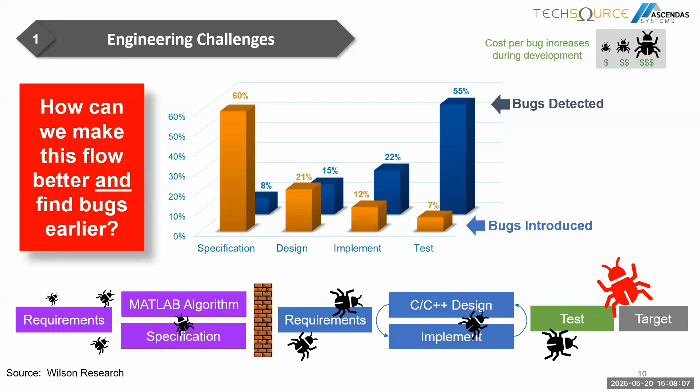In this case, how do we make this flow better and find bugs or errors early in our design? We will help you do this using our tools for model-based design.

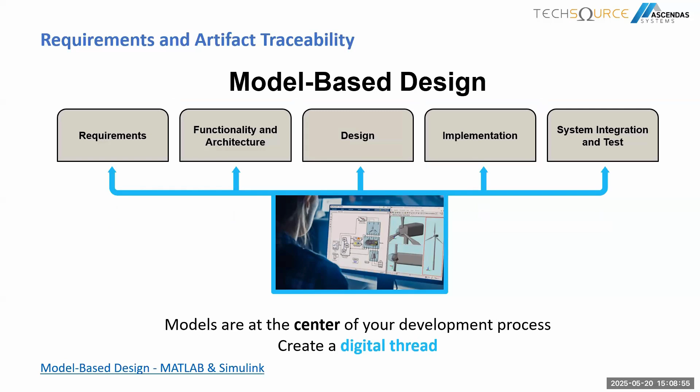Number one is actually requirements and artifact traceability. With model-based design, which uses multi-domain models, this serves as a single source of design truth across all phases of development, so that you can eliminate the barriers in the development stages by promoting understanding and communication across all these different teams. That's the first thing we wanted to share - working in a single environment with requirements. Models are actually at the center of the development process, creating a digital thread that enables all the systems to be connected in this case.

So what model-based design actually gives you is the automation of the processes. So we start with requirements, specify system behavior, and then we do simulations, right? And then from there on, we do the foundation for automation, which is code generation.

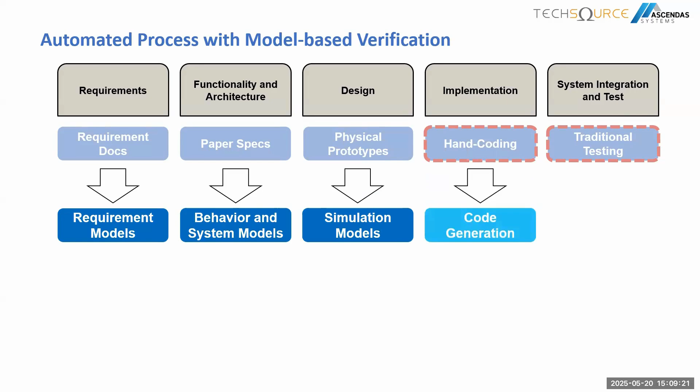And then in this case, the testing is not actually only at the end of the design process, but it's much more within all the scopes of the system design, starting from the requirements verification, and then early design verification on your models. So we are actually verifying from the start until the end of the development process.

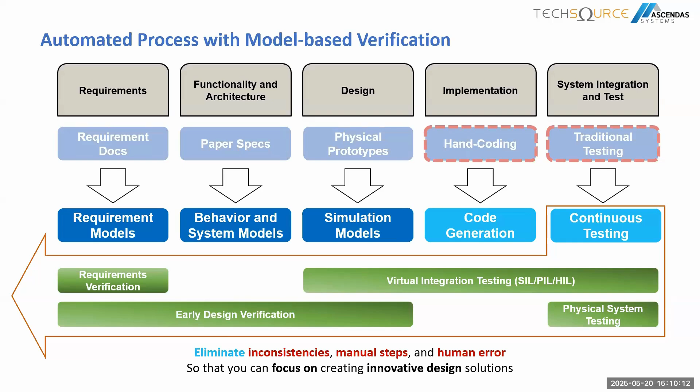So in this case, we eliminate inconsistencies, manual steps, and at the same time, we avoid human errors. So every design engineer is just focusing on the algorithm development, on innovative design. So that is where I think model-based design actually gives us an initiative.

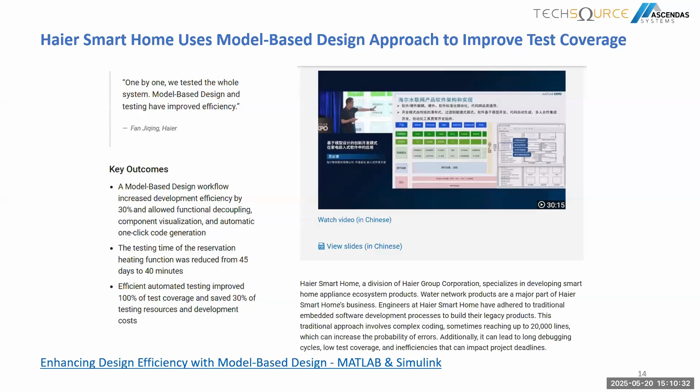So I'm just showing a few examples of our customers that have used model-based design to develop their products, their algorithms, their embedded systems using a model-based approach. So let me go through more details of why verification and validation is important, and how we make use of it.

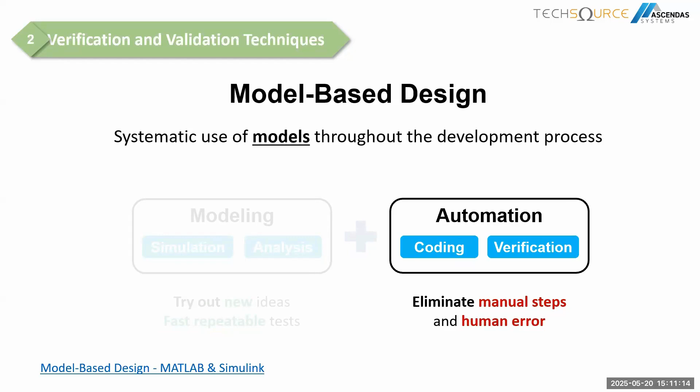Systematic use of models throughout the process, where models let you try out new ideas in fast, repeatable tests. So you can do many tests in a single click. That, I think, is very important. And then in the case of automation, we develop mostly automated coding and testing, thus eliminating the manual steps. And eventually we remove the errors.

So this is the main objective of verification and validation, where early simulation-based verification and testing is done through the model-based design workflow. It succeeds in interconnecting the requirements of the product or project and the functional design; everything ties up. And the verification of the design is tied to the requirements.

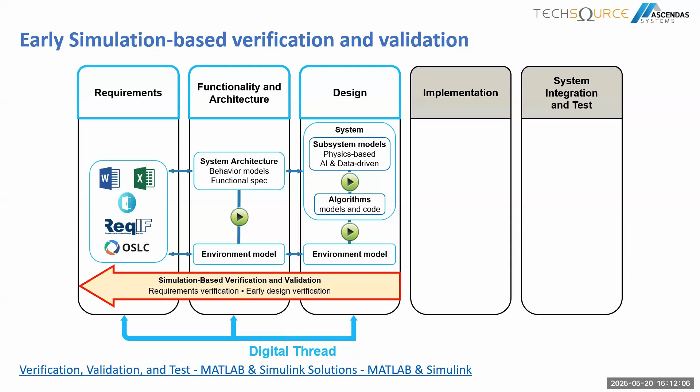So at the same time, we are verifying the design, and we will be catching all those errors and bugs early in the design phase. So that is the objective of simulation-based or model-based design verification and validation. From requirements to testing to implementation, we are able to do this verification.

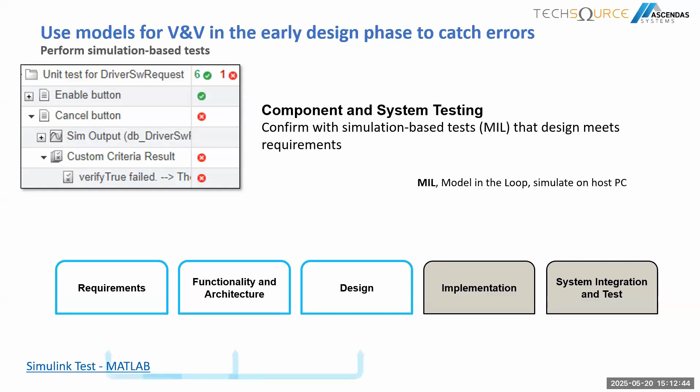So an example is component and system testing, where we want to do a simulation-based test. In this case, MIL, which is model in the loop. You are developing certain models, and from those models you do simulation-based tests to ensure your design meets certain requirements. So those are the things that you want to do.

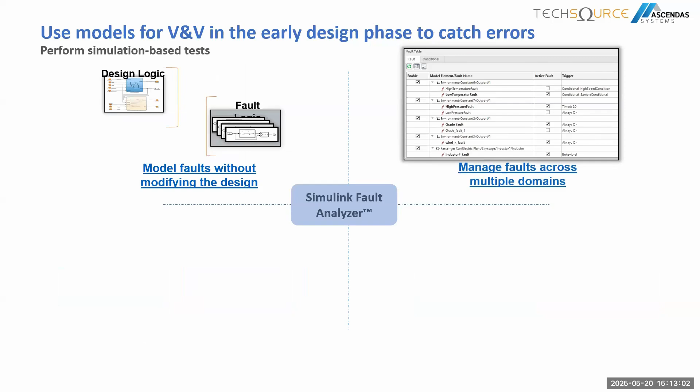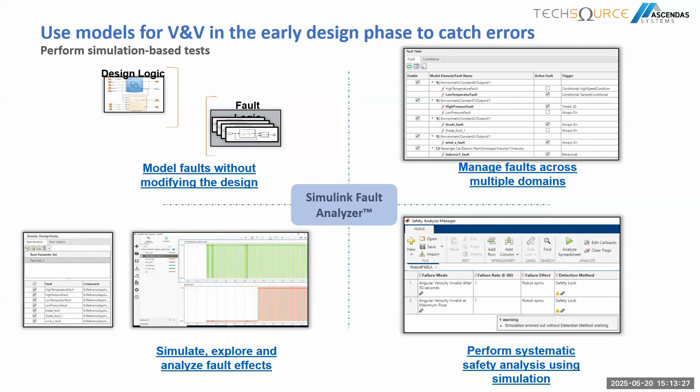Another way is Simulink Fault Analyzer, where you are able to place faults or errors within the system and check whether your algorithms detect these faults. This is especially useful for safety systems, where we are able to emulate certain kinds of faults within our system and eventually catch all of these, as examples of debug processes. So model-based design helps you do this.

Another one is standards compliance and review with static analysis. When developing implementation models, you need to ensure that the model conforms to the industry standard. So even at the start of the design, we are already checking this requirement, and we are also linking all these systems.

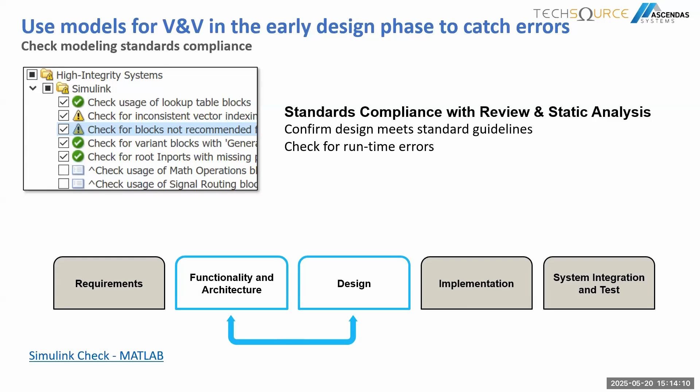So you can use Simulink Design Verifier to check runtime errors, such as division by zero or integer overflow, as well as dead logic. So we are able to run those checks in this case.

Some requirements, such as safety requirements, may be impossible to verify through simulation-based tests, so we are able to do formal verification. Simulink Design Verifier can prove that these requirements are always met. So these are just examples of what we can do.

So let me go to a demo where we will do requirements linking. And then we will do a little bit of Simulink Test, where we can run multiple tests within the system that we want to test.

And then I was telling earlier that in just one click, maybe we can actually do a lot of testing. So let me go through an example that I wanted to share with you guys. Let me open up my model. I hope you can see my model. This is a position control of a DC motor.

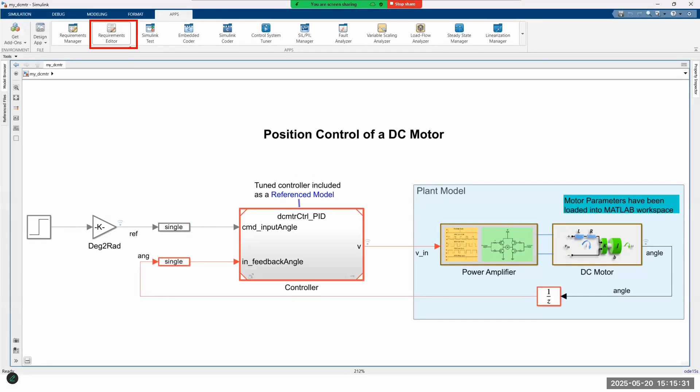What I wanted to share is how do we link requirements to the models or the design that we are going through. So for example, we want to open the Requirements Editor. Let's open it up and see how we can use this tool. In this case, I already have some requirements that I imported earlier. If you want a new set, you can just place a new set and then add child or parent requirements.

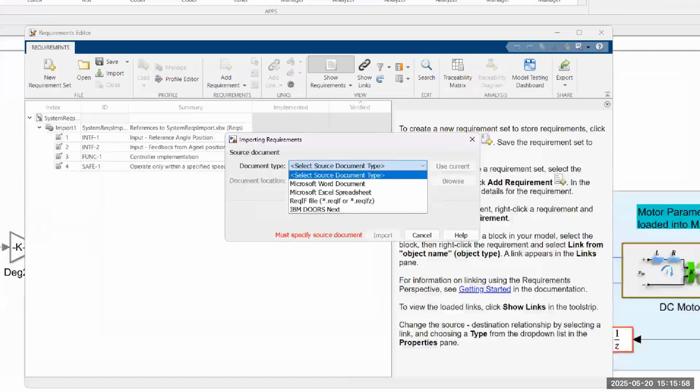Or you can also import files from external sources. In this case, you are able to import certain files that you want to use. For example, most of our requirements are coming from Word documents, right? Or Excel files. Or in this case, a requirements document, which is ReqIF, the Requirements Interchange Format.

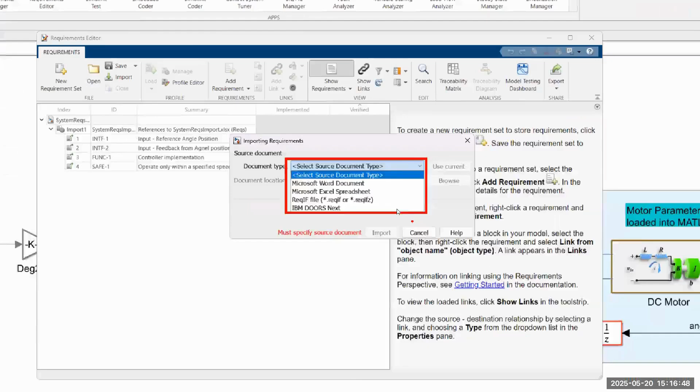So maybe if you're familiar with DOORS or maybe Jama, I'm not sure if they are able to create a ReqIF file, but I guess you can export it from those third-party softwares and then import back to MATLAB or Simulink. In this case, I was able to import it from an Excel file, which I did earlier, and then provided some linking.

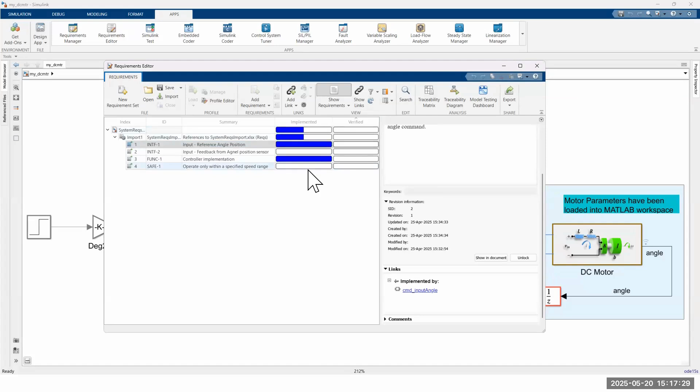Some of these requirements are already linked. So maybe I can show you. These requirements can show you if they are already implemented or you want verification. You can see here two columns, which show you if certain requirements are already implemented or not, or if they are doing certain testing. In this case, the blue ones are the ones already implemented, for example.

So let's say we wanted to implement this one. The implementation is seen here, where you have a link on the Requirements Editor itself, and then you can click it, and it goes to the model where it is linked. So in this case, all the design and the requirements are linked together.

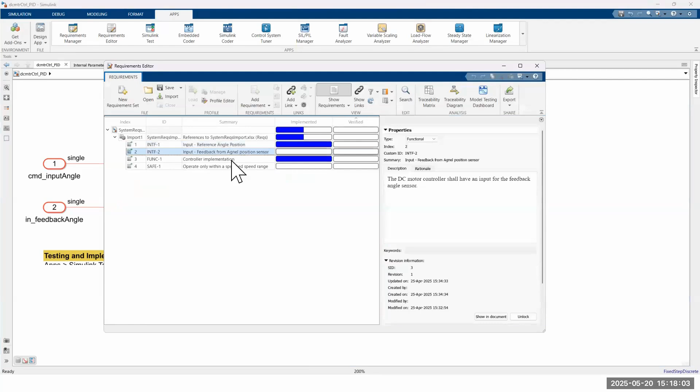So for example, we want to link this requirement. We just right click this one and select for linking the requirement. And then, for example, this input feedback is for this requirement. So it goes here, and then we right click this one. And if you can see, we can link this requirement in selection. So select for Simulink linking. With this, you are able to link your requirements on the system.

So now you see it's now blue. It means it's already linked within your model. So the linking is very easy. It will be implemented by this, and you can see it's being highlighted. So that's how easy it is for engineers to have documents for requirements, and then link those requirements within a single environment, MATLAB, using the models that we have.

Later on, we want to link also the testing for the requirements. So here we will see certain requirements being linked in this testing. So this is one way of linking all those requirements. So now how do we do testing for our model-based designs? Let me close this one for the moment, and then let me open up

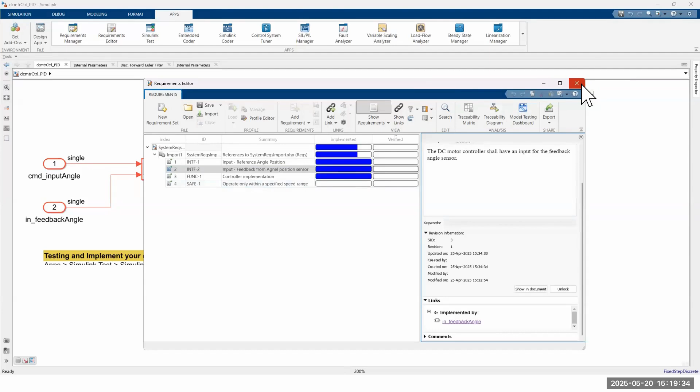the model again. So here in this model, we can open up the app that we want to use, which is Simulink Test. With Simulink Test, we are able to do multiple tests in one single click. Let me show you how we can do this test. First things first, we have to create a harness. A harness is an isolation of the model that we want to test. In this case, we want to isolate the controller. This is the one we want to test.

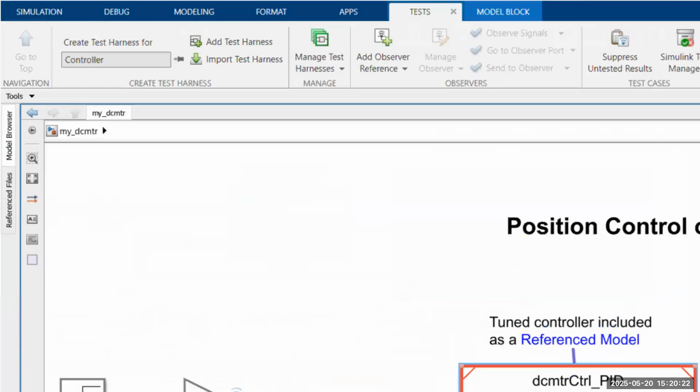So if you see here, we have already selected the control harness for the controller, and then we can actually add another harness for this. So once we have opened the add harness button, we can specify certain inputs that we want for the model. So for example, is it a signal editor in this case? Is it from workspace? Is the data coming from the workspace? So we can also do that, or a test sequence for that matter.

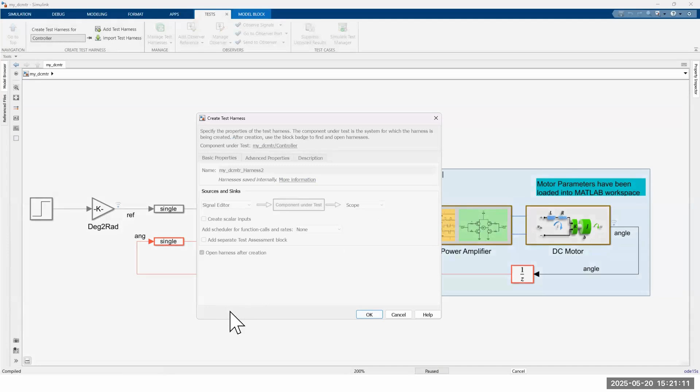So maybe let's select, in this case, a signal editor. And then this is actually our test component, which is the controller. And then let's say we want a scope only. So we can create those by creating a harness. So now we are able to actually create the harness within Simulink itself.

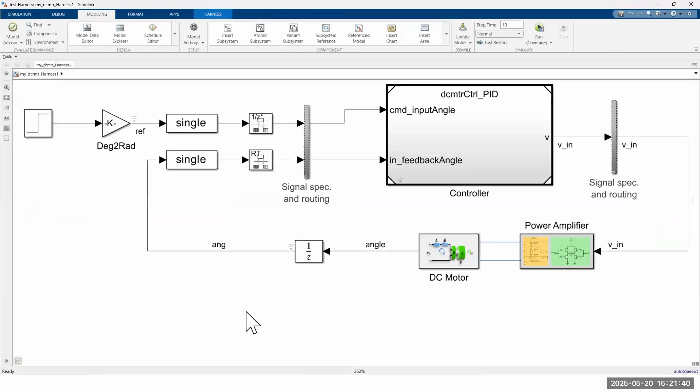So this is the created test environment. This is the input signal, which is the signal editor. And then this is the controller that we wanted to test, and the output we can actually view. So from here, we can do several tests in this case. So I have prepared already a harness for you for our testing, to be used for our simulation.

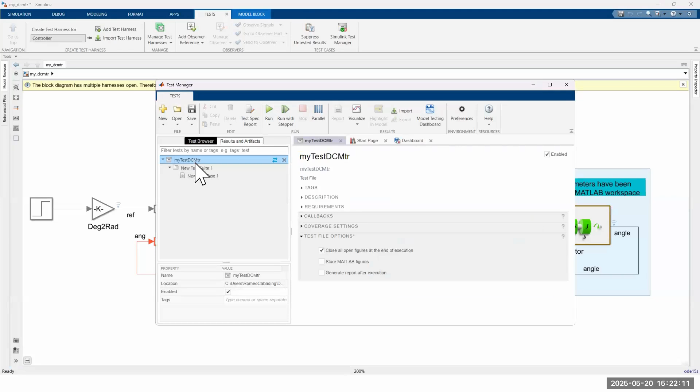So let me open up Simulink Test, and then see how we can easily do multiple tests at a single time. So I already have some similar files that we can use. So we can tie up several tests. So we can create a file, and then we can create a test suite, and then we can create new test cases. So with these test cases, we can run multiple tests. It can be more than what I'm showing. So you can run multiple tests.

You can do baseline criteria, for example. Baseline criteria is that you want this baseline data to be compared to some other simulation, and see if the system is responding similarly to this baseline requirement. So you can compare signals also in this case. And at the same time, you can also add a requirement in this case. So you can add certain requirements for this one and then link them to your testing.

So this is one way that we do testing and simulation within a single environment, and then easily you are able to create test cases for your systems. So that's how we are doing testing for multiple types within our model, to verify the functions, to verify the behavior of our systems. So yeah. So let me go back to the slides that I have.

So I have shown you the Requirements Toolbox and how we can easily add requirements and link those requirements. And then I have shown you how we can add a test harness for our model. And then from there on, we will add more testing scenarios for our simulation. So this is how we are doing the systems design verification and validation of our system. So from the requirements and then the testing, we are able to link everything together. So hopefully this helps you in your journey in embedded design.

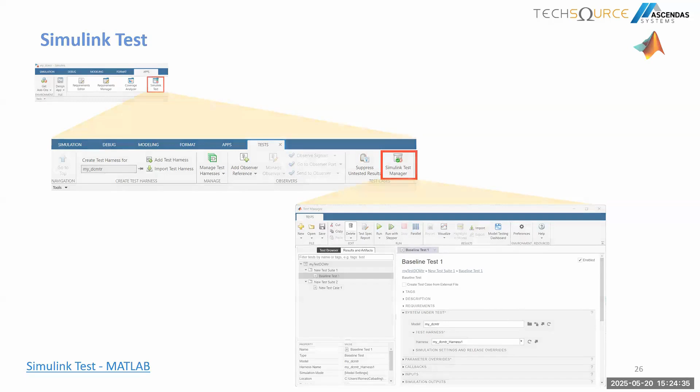So now let's move on to how we are doing model-based design code generation. Now we are moving a little bit to the subsystem implementation phase, where the code that will be deployed on the system in operation is being created. So specifically, this code links to the point where system requirements, documents, and your models are together. So there is traceability between the model and the code that is being generated. So later on, I will show you how this linking is done. This is automatically done for you from the design to your code.

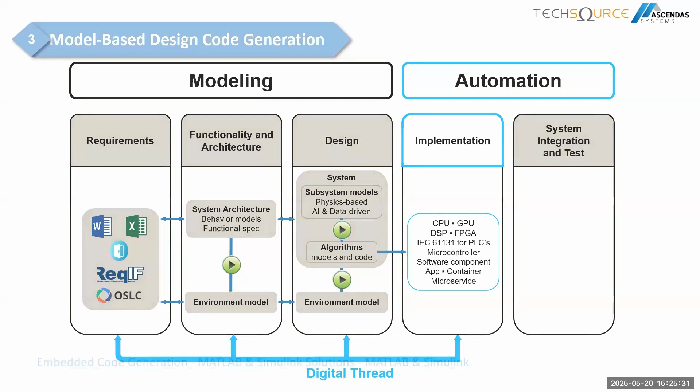So this is accomplished through the use of automatic code generation. So our core platform in MATLAB, Simulink and Stateflow all support automatic code generation to a number of different targets. So in this case, it can be CPU, which is relatively low cost and readily available. Other deployment can be GPU, a little bit more expensive to execute, but faster than CPU, right? Another way is to deploy using PLCs, or programmable logic controllers, which often control machinery or manufacturing processes in the factory, right?

In the factory setting. So these are several ones. Or we wanted to deploy on FPGAs, for applications that don't require really too much power or something like that. So within these 4 levels, model-based design may be able to help you to generate these codes

automatically. MATLAB is also able to generate code on big data platforms, cloud platforms or services, or edge networks. But this discussion is much more about embedded, which is focused on CPU deployment or maybe GPU, PLC, or FPGA. So you can automatically generate code from models you have created in MATLAB, Simulink, or Stateflow, for example, onto these targets or devices that you want to deploy.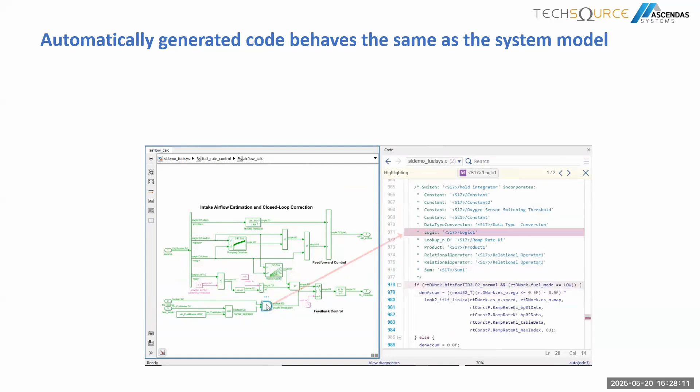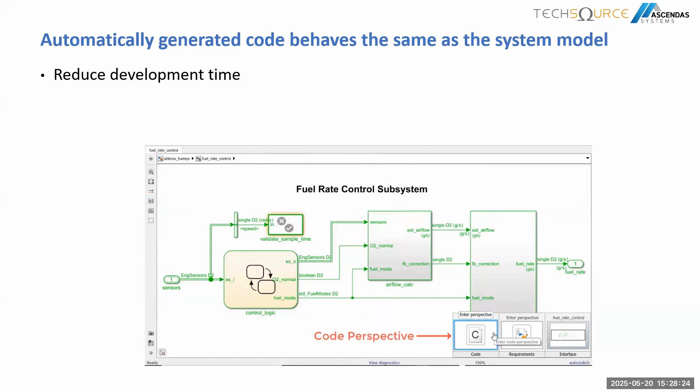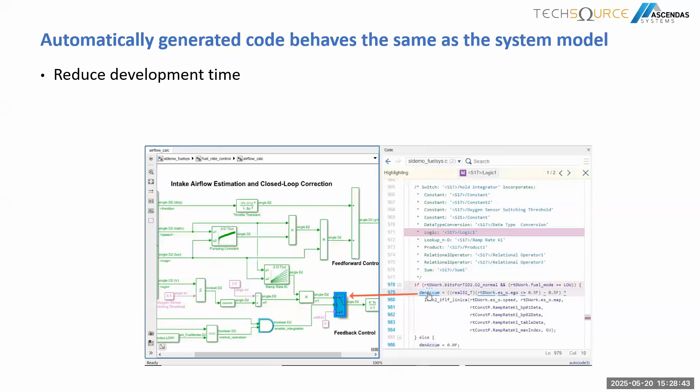So automatic code generation generates readable, compact, fast C and C++ code for embedded processors. You can integrate it with handwritten or legacy code, and still check it using our tools. What it does is help us to reduce development time because the code is automatically generated for you. And it also eliminates the errors prone with manual coding steps, refining executable specifications into the target device that you want to deploy.

And then you can use bidirectional linking in Simulink models to trace how your model is coded or from where in the Simulink model the code has been generated. So there's a link from the model that you have created to the code that has been generated, so it can be interlinked. In the code perspective, you can look at the code side by side. So automatic reusable code generation eliminates manual coding, reduces development time, and eliminates hand-coding errors. So it's the ease of integration of the hand code.

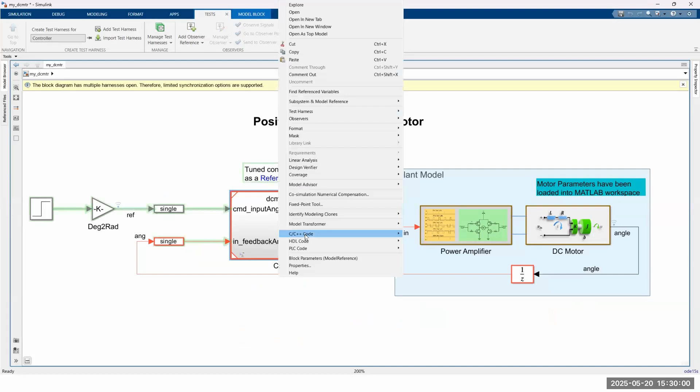So let me show you a little bit of how we have done this code generation. Again, I go back to the controller that we designed earlier. In this case, this is a reference model, so I cannot easily right click and then generate the code. So I have to open this as a top model. And then from here, you can generate code.

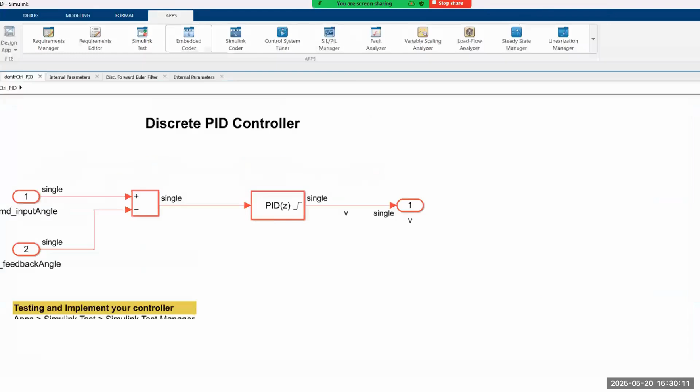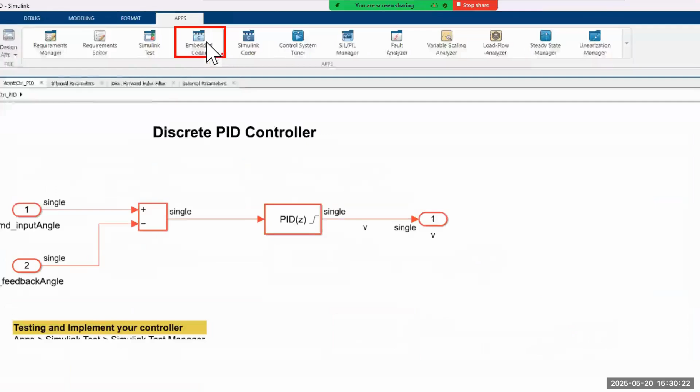So we have this tool called Embedded Coder, which helps you to auto generate these systems. We have other coders also that you may want to use, but for the moment we will be focusing on Embedded Coder. So let me click Embedded Coder. Embedded Coder has several functions. You are also able to use a code advisor, which checks your systems for any errors or anything that you may want these codes to be checked for. So this is one way to do some kind of auto coding.

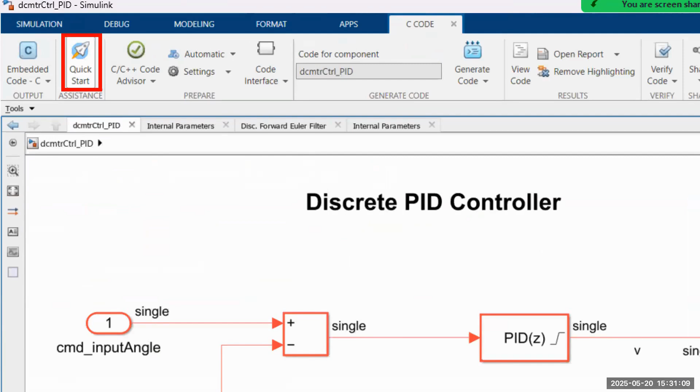So you specify the settings of the code, and you are able to do that very fast. There's also a quick start button that guides you on how to specify each of these parameters. So maybe I can open it up and you can see. You go through the process of Embedded Coder where you specify the system that you want to code, the output and how to deploy it, some kind of word size. I think this one is for memory and certain optimization, and then we generate the code.

So in this case, we can also use this tab and see the code that we have generated. I have earlier generated the code for you. So this is the generated code for this controller. As you can see, it's not manual coding. Everything has been automated and carried out.

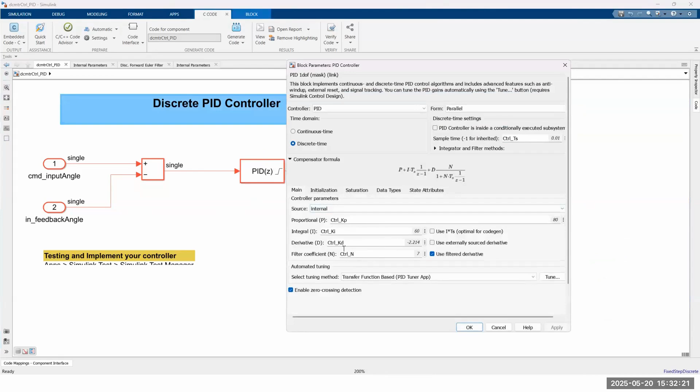This is, I think, C code that I have generated. So in this case, you are able to actually see also this. So certain variables are already specified depending on the requirement. So this KI, KD, for example, is actually within the model itself. So actually, these are the KI, KD parameters which are also already in the code itself.

Then if you want to actually see the traceability: you can highlight certain parts of the code, and then you can see where it is actually coming from. So this is actually the traceability that you want for this system. So the design is actually linked also to the code that you have generated.

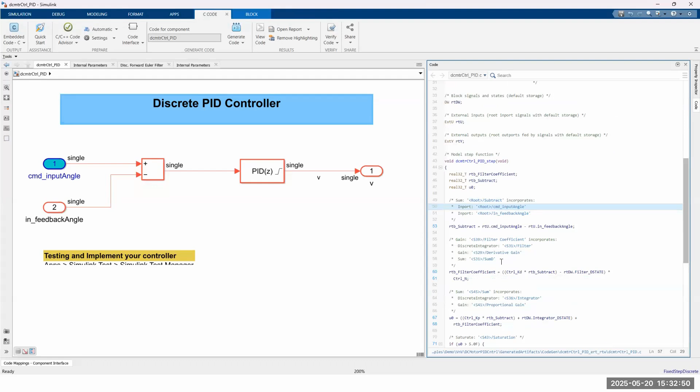So you can see there are blocks within that controller, which is shown here, that link to this code generated for you. So this is one way for you to see the traceability within your system. So this is a way to eliminate hand coding and at the same time eliminate errors.

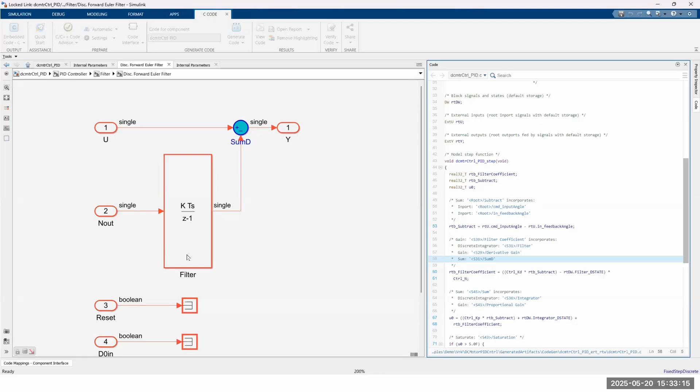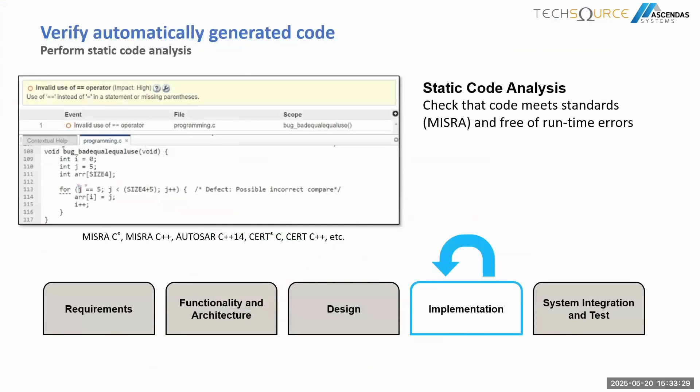So okay, let me go forward with my slides. So that is what we have shown earlier, the auto code generation. So this one, we have generated the code for static code analysis, and there are a lot of tools that we can actually use for code generation, testing, and quality of your system.

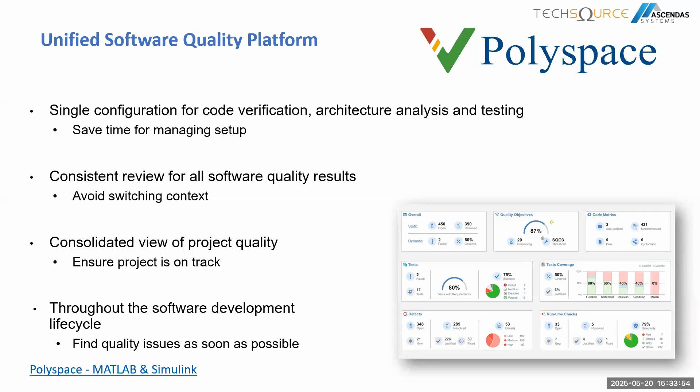So another one is Polyspace. In this case, it's for testing new products. So we have this product for easier testing of C++ code, to automate and simplify our testing work. So this is just the Polyspace tool chain that we can use for this testing. And at the same time, you will use it also with Simulink Test and Requirements Toolbox, where you tie everything within the model itself. So those are the things that we do.

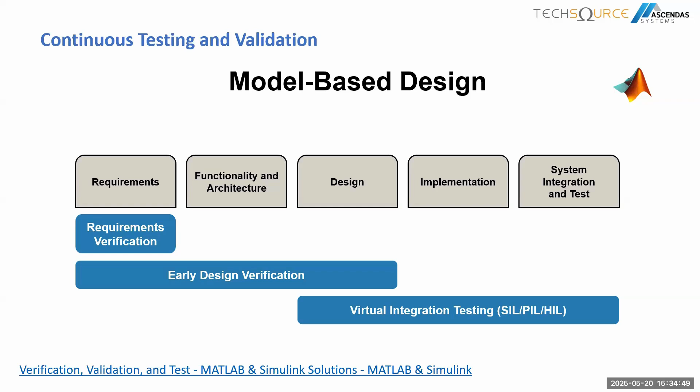So now we have shown you that testing is not actually at the end of the project, but actually it starts from requirements verification and the early design process. So we have done the design, and at the same time we can do virtual integration on the implementation of initial code generated files, where we can check all these reports. So these are just some of the things that are able to help you out for model-based design, simulation, and testing.

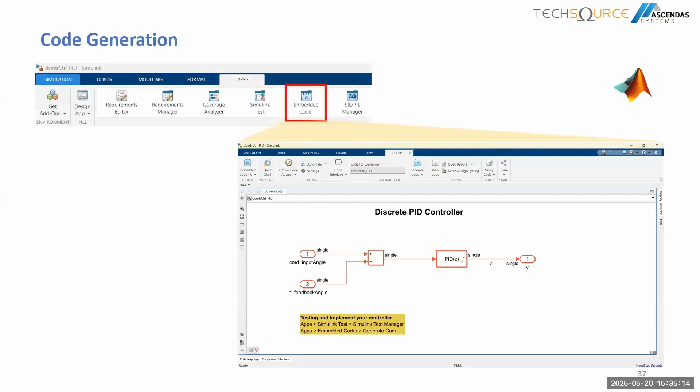So I have done the code generation demo. In this case, you are able to open up Embedded Coder for that model and then see how it works. So another way is we can test our system with PIL. So maybe you want to do testing because you want to implement it into a processor. So let me show you how we can easily do a certain test of this system.

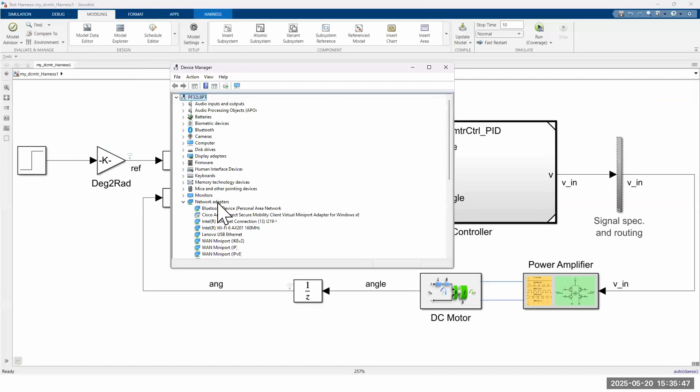So I have connected a C2000 board in this case to run a PIL. So let me open up the file. Actually, this is the test file that we want. I would just like to change the configuration to a PIL mode. Let me have a moment, and then, in this case, configuration PIL. Yeah.

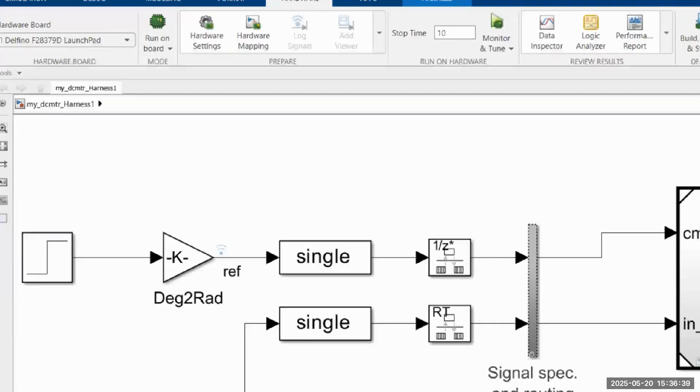So here you can see my hardware settings have been changed. In this case, I have a board connected, TI C2000 example. So you are able to check certain hardware settings if you want, and change the parameters. You're not limited to what I am using right now, but you can change these parameters to the packages or hardware support that you want to use.

So it can be any other supported microprocessor boards that you may want. So you can specify the parameters within that test and then run the test within the system. So there's a PIL manager where we can run the system and specify the blocks that we want to have in the model. So for example, this block, the PID controller, we can specify as PIL mode and then run it as is to do the simulation.

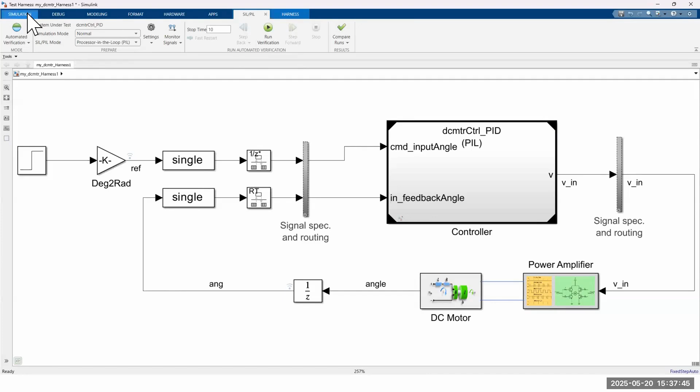So I think I have a result for the simulations earlier. Let me check if it's still there. So this is actually a comparison.

Let me open this up and compare. So there's a result that I have for simulation. I have a simulation run and a PIL run. This is the run from the PIL model that I have in this case. Within Simulation Data Inspector, you can actually compare these signals.

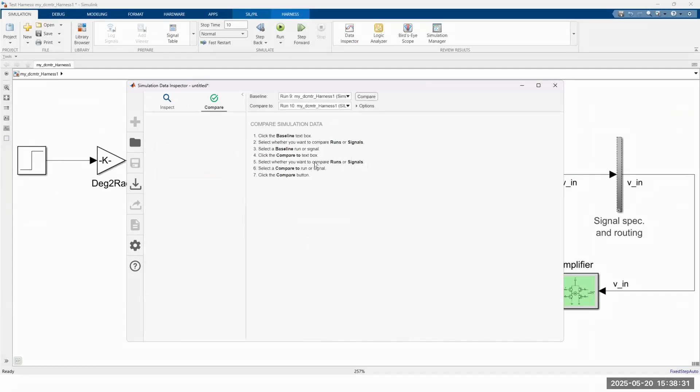So in this case it's run 9 and 10. Let's say, for example, we want to compare 9 and 10. So you can compare this, see this one. You can see two signals within the comparison and there's no difference.

So what it does is actually compare this model in the loop test and then a deployment of this controller function into the microprocessor, and then compares if they have the same behavior or characteristics. So this is one way of checking not only the model itself, but actually the actual implementation that you wanted to be deployed.

So in several cases you may want to deploy it. In my case it's microprocessor based, so the deployment is within those requirements. I run the comparison data and see that the results I have are pretty much not different from each other. You can see that tolerance and difference are 0.

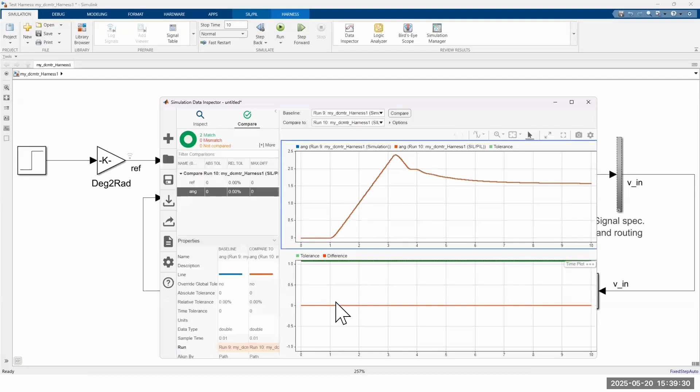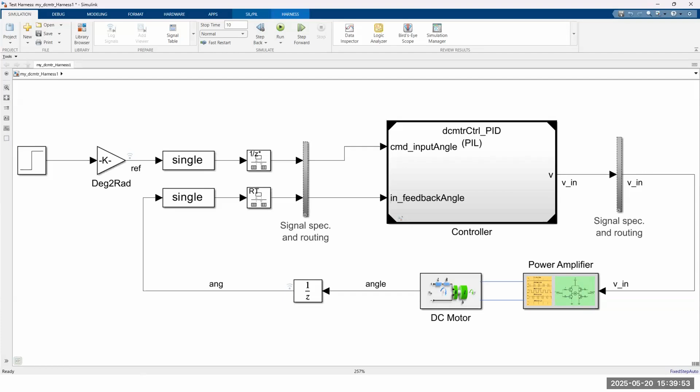So now I can confirm that the result of my model from model in the loop testing is similar to the PIL testing that I have. So if I deploy it into the hardware, I am confident that it's the same - it will behave similarly. So that's how you can compare PIL signal runs.

You run initially at model in the loop testing, but later on you want to actually test it as an implementation into the hardware - in a microcontroller evaluation board, for example. MATLAB supports some boards that are there, you can check it out. I think the TAs can also point out the hardware support packages we have for certain microprocessors.

So in this case we have an example where we wanted to run the systems in hardware itself. Within model-based design you are able to do these testings. This is called PIL, processor in the loop testing.

In safety systems, actually there are several types of testing. If you are familiar with the V model or the V&V model, there are several testings that start with this one. One is model in the loop, the one we have shown you earlier. Then you can run SIL, software in the loop, where you code generate and run within the processor only, internally to the system. Then later on you want to deploy it in the hardware and see the results. So these are just some ways for you to verify and validate your designs.

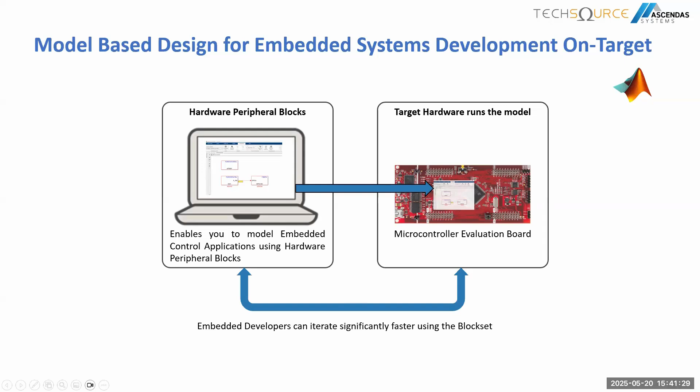Let me push forward. In all of these requirements, some of the developments can be tied up to industry standards or compliance. If you're working with automotive systems, you may have heard of ISO 26262 functional safety requirements. If you're working with aerospace, maybe you've heard about DO-178C, and other things, maybe medical devices also you may have heard. So some of these development cycles actually require certain industry standards for compliance.

MathWorks actually supports these certification processes. It helps you generate the artifacts for you to develop and test all these things. But it doesn't mean it's only for automotive, aerospace, or medical - every product in the industry right now requires a certain level of compliance. So you can search how MATLAB and MathWorks tools may be helpful for you to meet those industry standards and compliance.

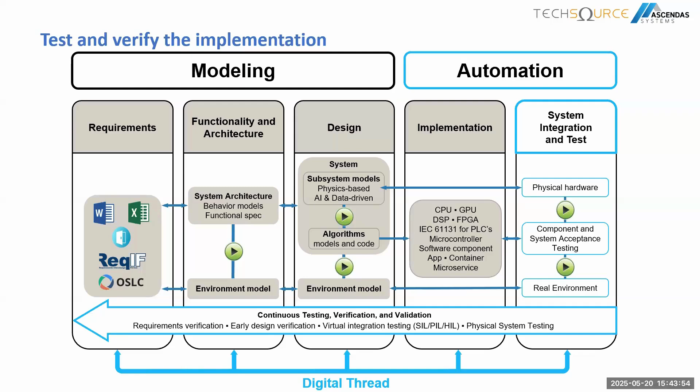So we can actually develop all these systems within model-based design. And then finally, we can integrate also the system integration part, where we have the physical hardware and then do a real time, or real environment in this case.

So there are a lot of tools that we can actually use to verify our implementation. For back-to-back testing, this is what I showed you earlier, for example equivalence testing for SIL and PIL. You saw that I compared a simulation run for model in the loop versus a PIL run. So in this case you are comparing, or back-to-back equivalency testing, for your algorithms. So that's one way of using it.

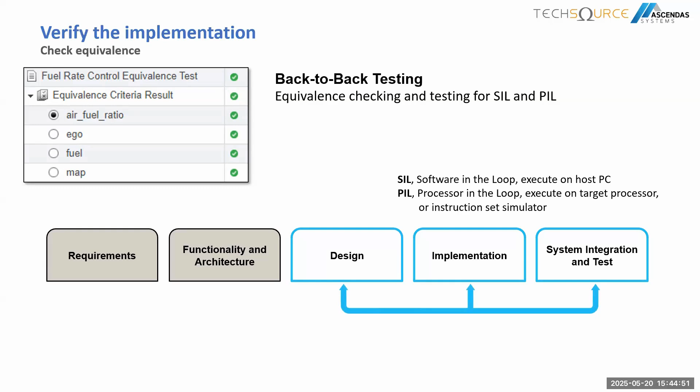You can use Simulink Test to verify all of these requirements, test and then tie it to your requirements. So that's the objective of this case. So you are able to do simulation and back-to-back testing, and at the same time, as shown earlier, automatic code generation. So you could also generate back-to-back testing or coverage analysis for your models in this case.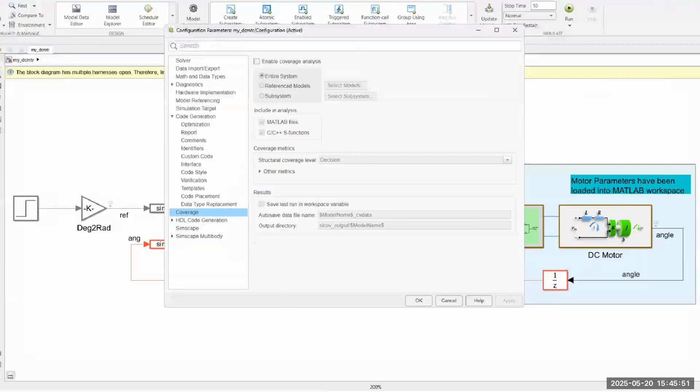So you can use Simulink Design Verifier to automate and generate test vectors, for example back-to-back testing, and to analyze certain missing coverages. Let me show you a little bit on the modeling, even though it's not part of the demo, if you want to see some coverage analysis. Within the Simulink model design you can easily enable the coverage of your system, enable the coverage analysis. So if you have this tool, if you have this license, you are able to enable the coverage of your testing and see how you are faring.

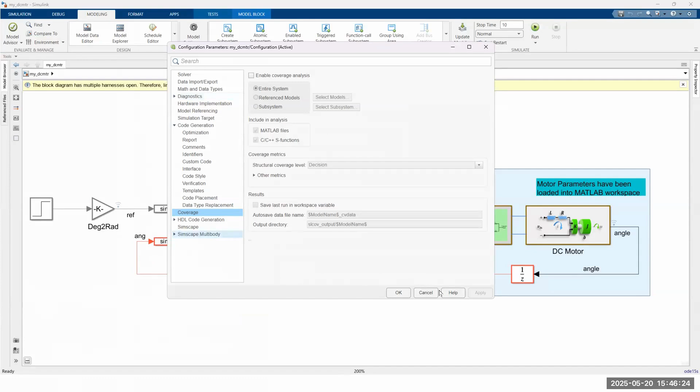So usually some of our tests may not be able to 100% check all the logic states, for example, or the variables that we have. So this will be helpful for you to check the coverage of your system. Let me go back to my slide. So you can do coverage analysis for your systems, and this coverage analysis helps to verify completely the design — model in the loop, software in the loop, and processor in the loop for final testing.

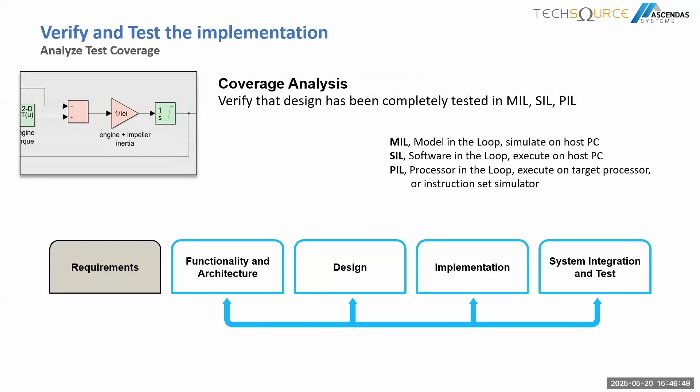To make all these things integrate, if you are working, as I said earlier, with vehicles or automotive systems, you want to qualify your certification kits, for example DO certification or IEC certification. It can also apply to aerospace. So this reference workflow can be used for medical, automotive, aerospace, and other safety-critical workflows. I'm not saying it's limited to this — it can apply to other critical workflows where you want to use this model-based V&V approach.

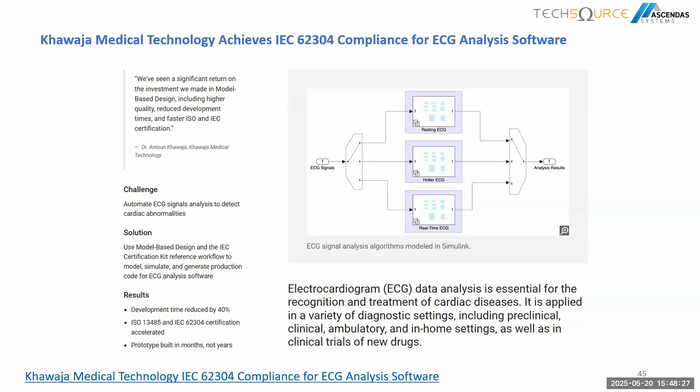These are just examples of our customers that have used verification and validation workflows to meet their qualification requirements, but also in medical technology — IEC 62304, you may be able to use the workflow in this case too. One of our customers is also using this for ECG cardiogram analysis. So you see the depth and breadth of how our verification and validation systems are tied up, especially for safety-critical applications.

So those are the things I wanted to show. Let me show a little bit of the Model Advisor, where you want to run certain parameters, for example the one I was talking about earlier — how do we do JMAAB, some Japanese requirements for verification and validation. So we have what we call the Model Advisor.

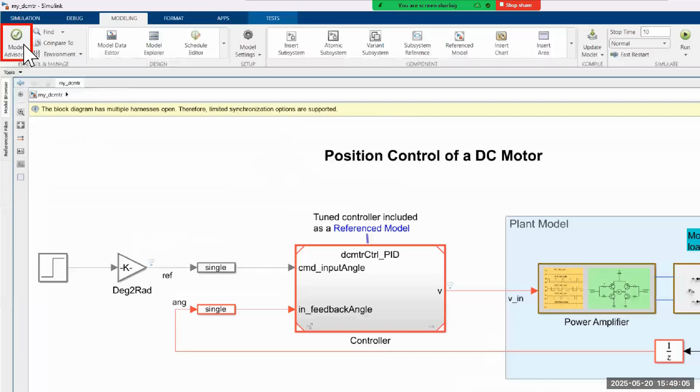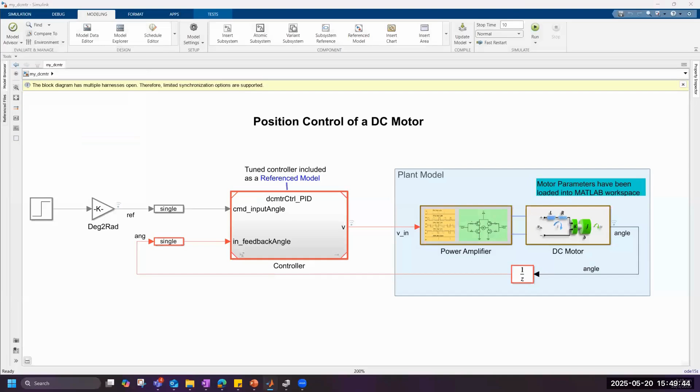This Model Advisor has a lot of — oops, sorry, let me go back — there's a lot of things you can use to check your compliance: check MAAB, JMAAB, MISRA, ISO 26262, or DO-178. You can run this testing. Let me open up the Model Advisor so you can see this. You're able to open Model Advisor and do some checking. Usually what I do is select by product what compliance you want to check for your system — for example, you want Simulink Check.

So these are just certain examples of MAAB, for example, JMAAB, or several models that we have. You can actually choose what kind of simulations that you want, checking that you want to do. So error detection, for example, with Simulink Design Verifier, or other kinds of simulation that you want.

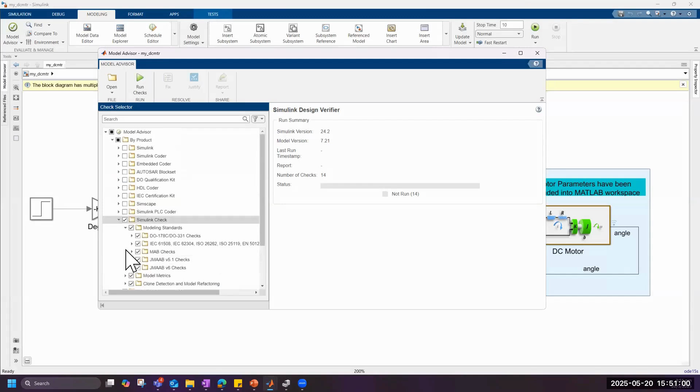So I have run an example of it. I have results that I have. This is just an example of the report that I have. So I run the PID SLX, the one we have as our controller. This is the controller that I run, and then the checks that I wanted to do. So for this case, these are the reports.

So you can see here, you can easily use this artifact. I used to work before with automotive, so you can actually use this artifact. Artifact is actually some reports or certain results from testing or something like that that you can use for your audit, for example, in kind of safety audits. In this case, if you're following ISO 26262 or any other compliance checking, you are able to use this report to see.

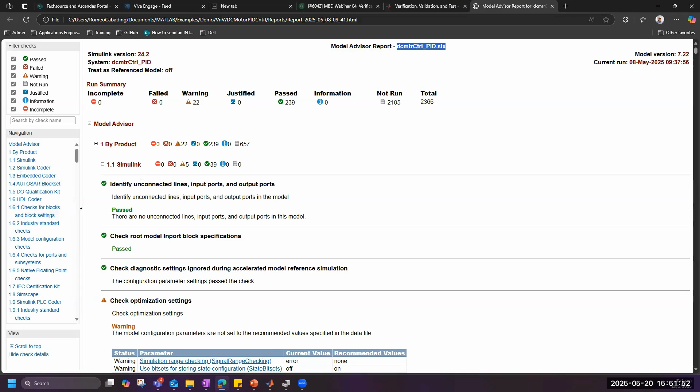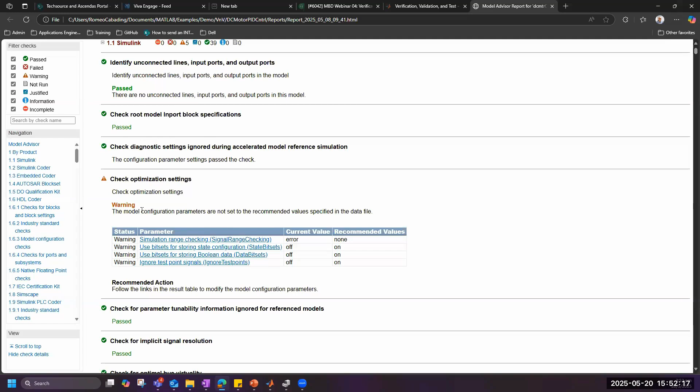So I check several items where I run these things. It can give you a pass or it can give you a warning in this case. But a warning is not an error, so it depends on how you want this requirement to be. It can also be just like a warning or a message for you, so it depends on what is important for you. So this already has results that are being checked for your code generation and deployment in this case.

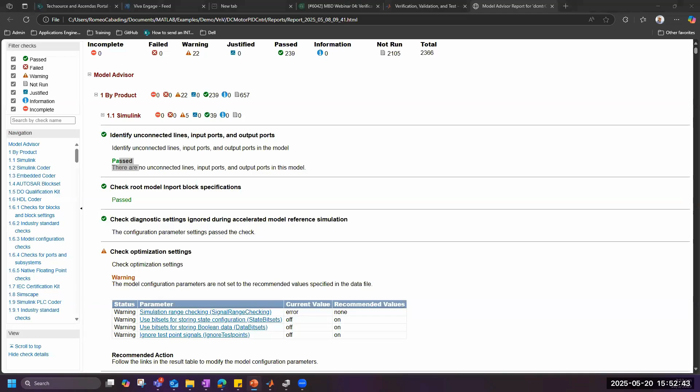So that's the demo for how we can do compliance checking with Model Advisor in this case, with Simulink Check and Simulink Design Verifier. So you are able to use these tools to do your system checking.

So finally, how does it tie up with the DevOps processes that you may have within your company? Usually, DevOps is employed for software with continuous integration and continuous delivery, your CI/CD functions. But if you have not known yet, MATLAB and Simulink tools are also able to adapt to your CI/CD requirements.

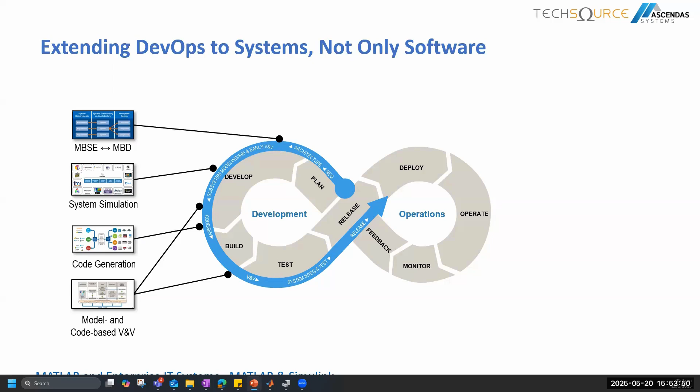So you can see here some kinds of stages in the system development where we have used several types of applications within MATLAB and Simulink, and how it correlates with some of the tools you may already be using, like CI/CD for Jenkins or maybe Git or GitHub, all these requirements you may have for the usage of ALM, continuous integration tools, and cloud infrastructure.

So actually, MATLAB and Simulink tools are able to connect to these systems, and then you are able to do your CI/CD automations for testing. So these are the ones that I just wanted to share with you in this case.

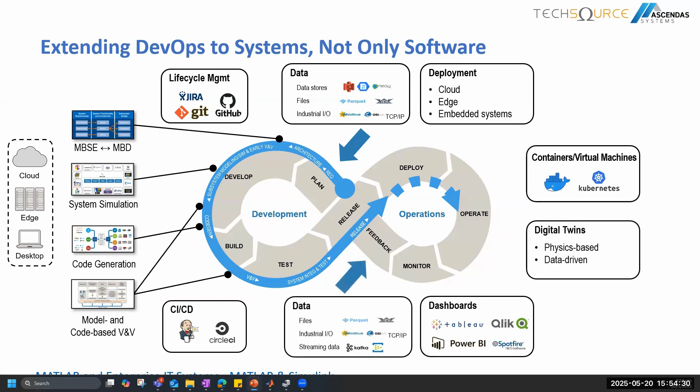So finally, I'm going to reiterate hopefully what you can take away from this. One is reduce manual coding effort through automation and verification, and then you can detect early errors within your system immediately after your design, ensure compliance with industry or safety standards, automate testing workflows with Simulink as we have shown you and other formal methods of testing, and hopefully generate an efficient, real-time, and deployable code in this case.